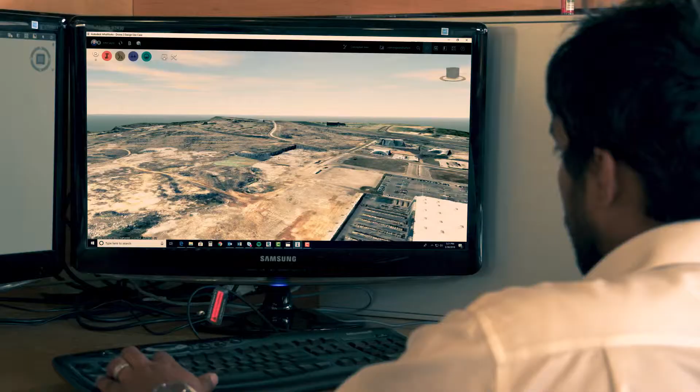The Autodesk BIM for Infrastructure Solutions, within the Autodesk AEC collection, helps civil and transportation engineers and land developers make smarter decisions that improve project outcomes.

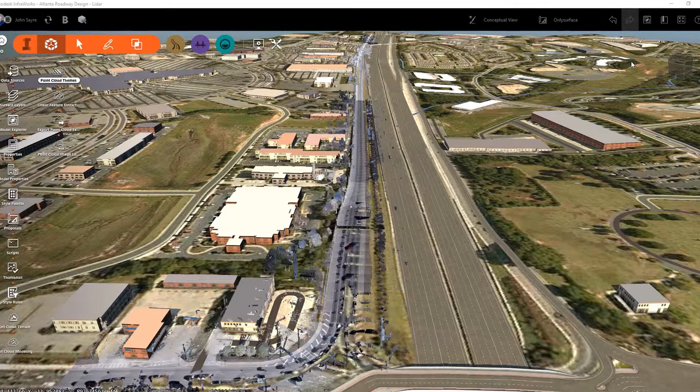LiDAR to Design, from the scan to BIM workflow, lets land developers and architects capture existing site conditions in hours instead of the days required by traditional survey methods. Inside of ReCap Pro, you can import mobile LiDAR scan data made up of multiple scans consolidated into one and interrogate the data. You export only what's needed to cover for your project.

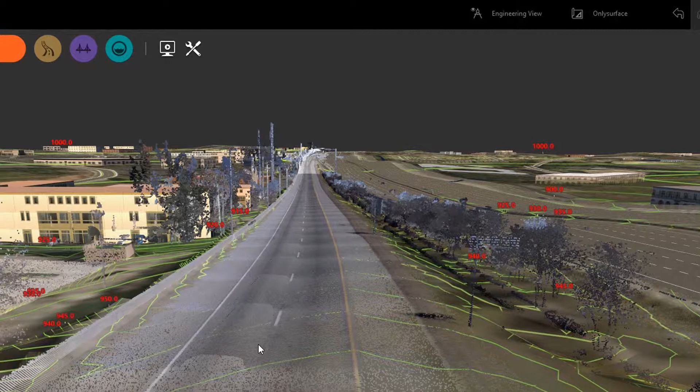Now use InfraWorks to generate an existing condition surface that accurately depicts your project's terrain model. By changing from conceptual view to engineering view, you can see the surface contour lines generated from the LiDAR point cloud. This allows you to visualize and understand how the terrain lays and its existing features and structures.

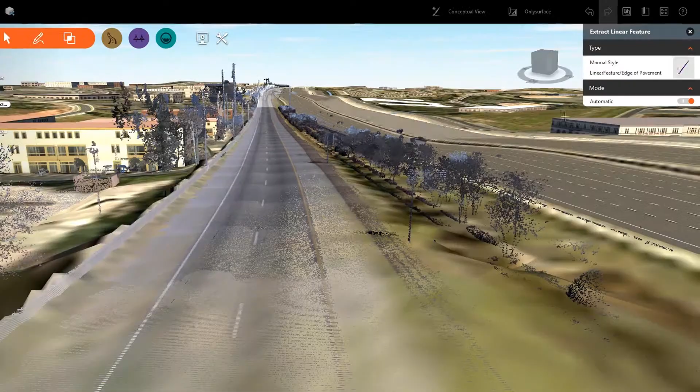This existing ground surface is used for linear feature extraction, for example the center line of the road striping or the edge of pavement striping. You can quickly inspect the model to be sure you have the necessary line work extracted. This line work is used for designing inside of Civil 3D.

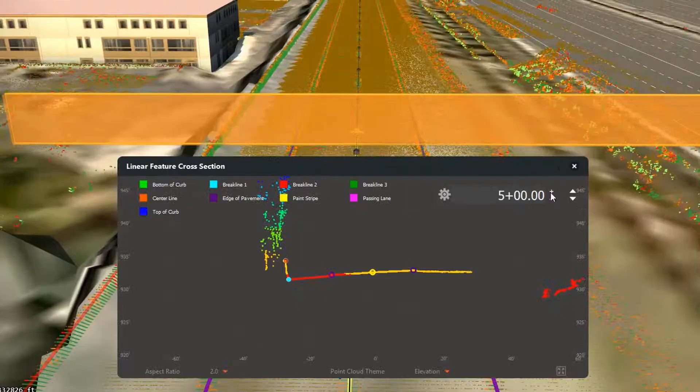You can also interrogate the model data with the cross-section view. In this cross-section view, you can add additional break lines to points in the section view and automatically generate additional linear features. Use InfraWorks to generate these transverse lines. These lines sample the cloud data at an interval and spacing, so you can export a lightweight but highly accurate version of the cloud data.

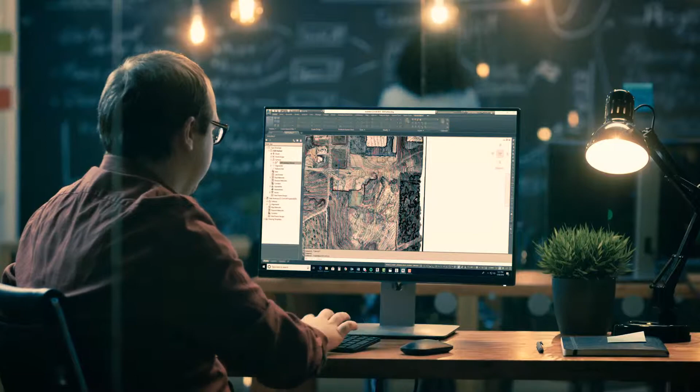Back in Civil 3D, you can utilize the highly accurate line work and surface information extracted in InfraWorks and apply it to your design. The Autodesk AEC collection provides the BIM for infrastructure solutions that engineers need to increase design innovations and efficiencies across infrastructure projects.